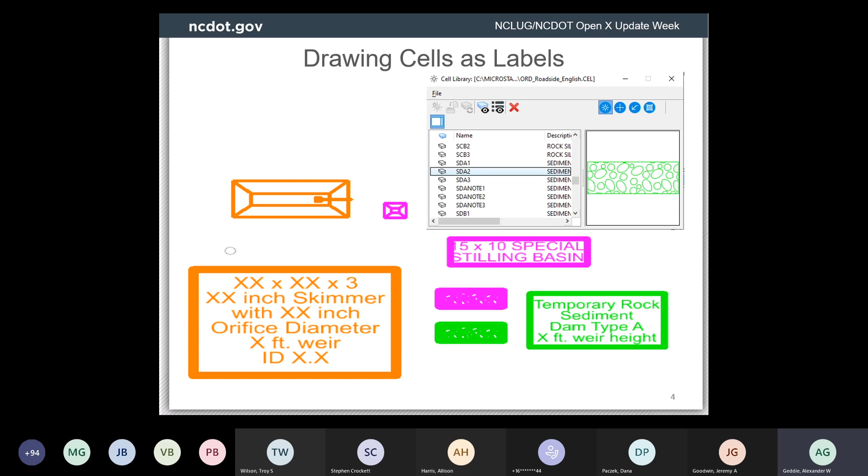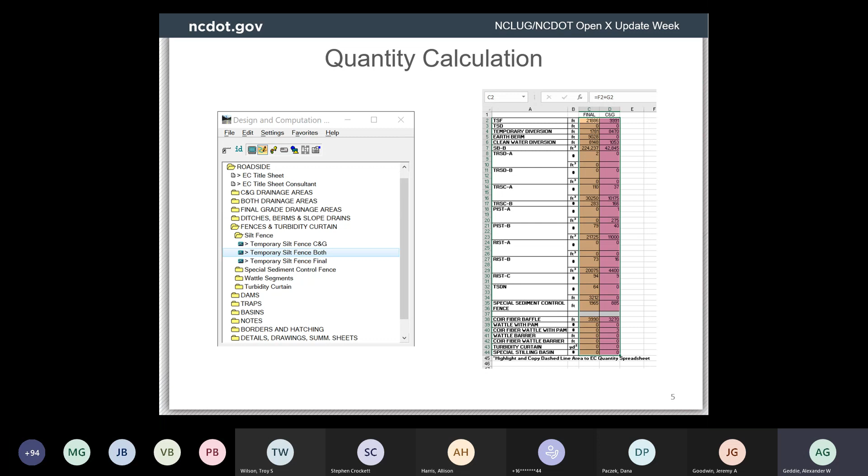And I'm sure those of y'all who have had to develop plans or review plans remember the design and computation manager. It was good for what it was at the time, but we're hoping with OpenRoads, and we'll show you, that there's a better way of doing things, especially since the old D&C manager was known for missing certain unchecked cells.

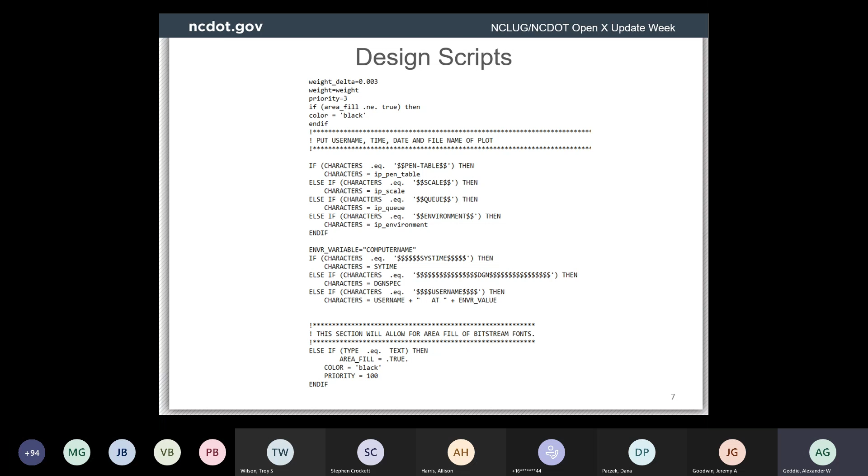Similarly, the level filters are no longer going to be the primary tool used in OpenRoads Designer. We have a new replacement for that. And I don't know how many of y'all have actually looked at the design scripts that we used to plot with iPlot, but the new pen tables are going to be a lot more useful.

So where we are now, we've developed a whole feature definition library, and so that's allowed us to utilize the geometry tools, whereas before it was optional to use the geometry tools, especially for roadside environmental. Now we're really pushing towards that because these tools are just a whole lot more intelligent.

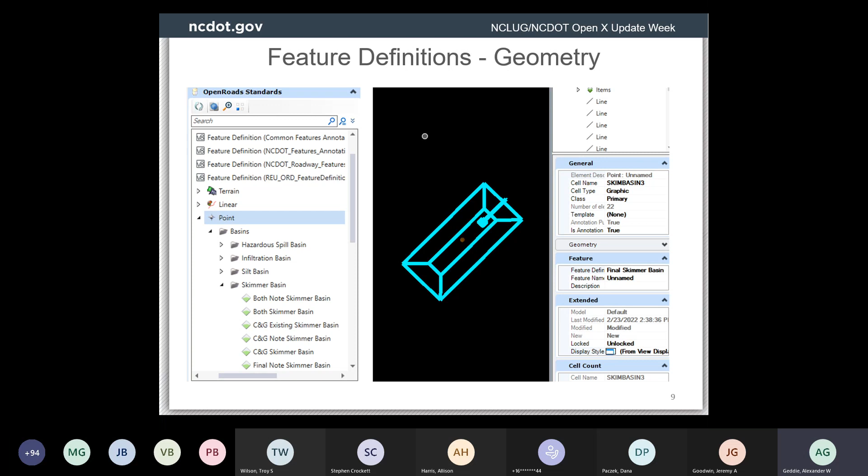So included in that intelligence, we have the quantities that we can assign to each feature definition. Each time we put down a basin, we can count that basin. What y'all are seeing on screen right now is more of a prototype, we'll rename stuff as needed, but it gives you the idea that every time we put down a basin, we're going to count it. At the end, we can export that to an Excel sheet or CSV file and count up how many basins, rock checks, and wattles we have on the project.

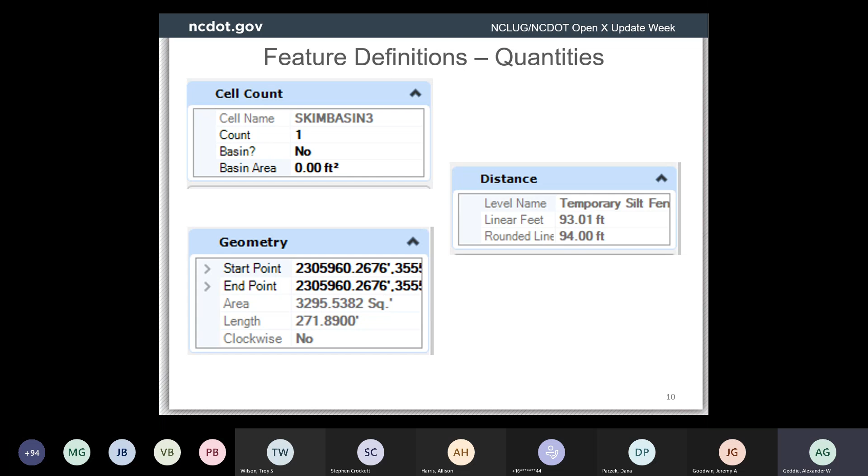Similarly, how many linear feet or sections we need for silt fence, and even potentially how much matting and grass cover we need.

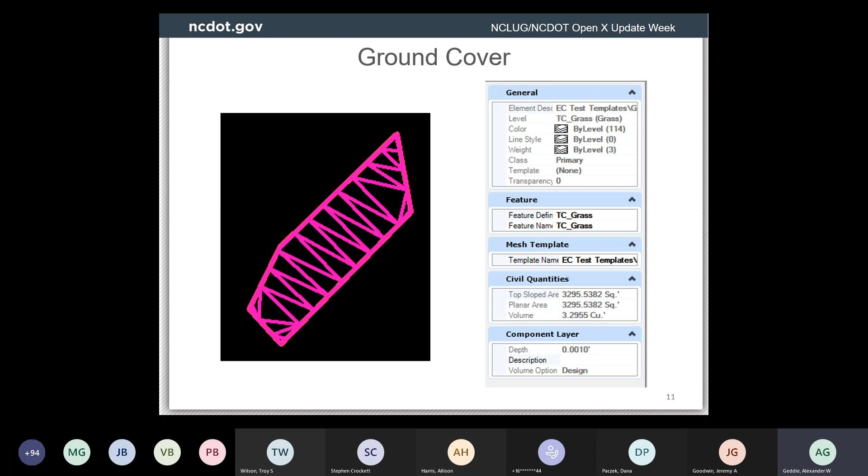Leading into that, we do have the ability, and we're working on this right now, of actually drawing matting and grass cover. For now, we'll still be using the matting summary sheets, but this will help verify that the matting summaries are at least somewhat close to accurate. If you see the civil quantities section on the right side, that's going to be one of our main references for matting summaries.

One thing we're really hoping to utilize is element annotation. Right now it has some restrictions, but we see this as a very important tool to speed up plan development or revision, especially with the interchangeability of a feature definition. If the designer says it's like a type B protection, and we say no, we want it to be type C, it's going to be a lot easier for the designer to just go back, change the feature definition, and bam, you get that C label.

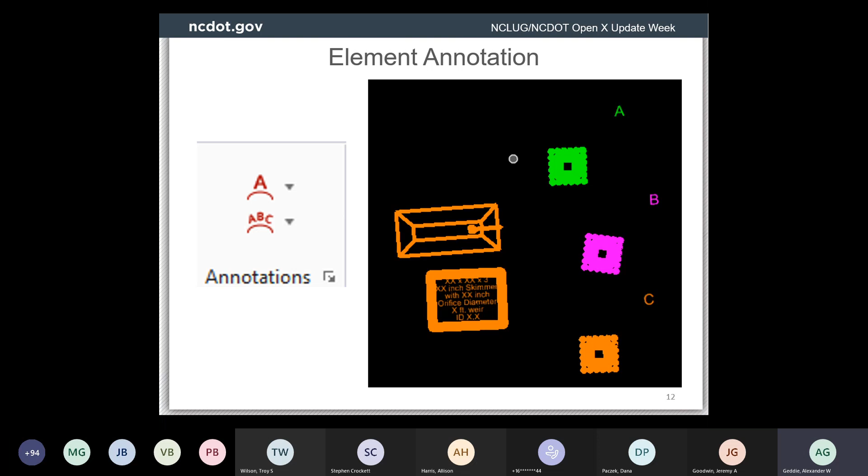Also for basins, no longer do you have to go searching for those notes. With the element annotation tool, you just select the basin and your note appears directly there.

So with the feature definitions and the information we've built into them, we're able to develop item type reports. This is going to be, at least for the foreseeable future, our reference for knowing where, or referencing against, the quantities.

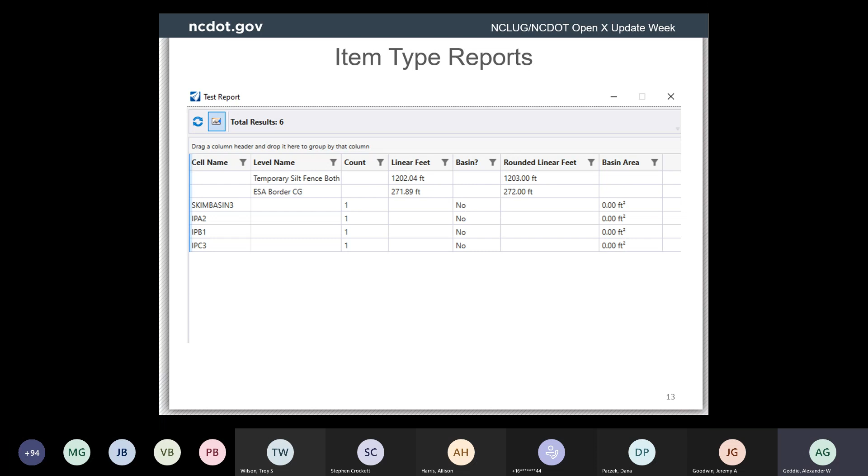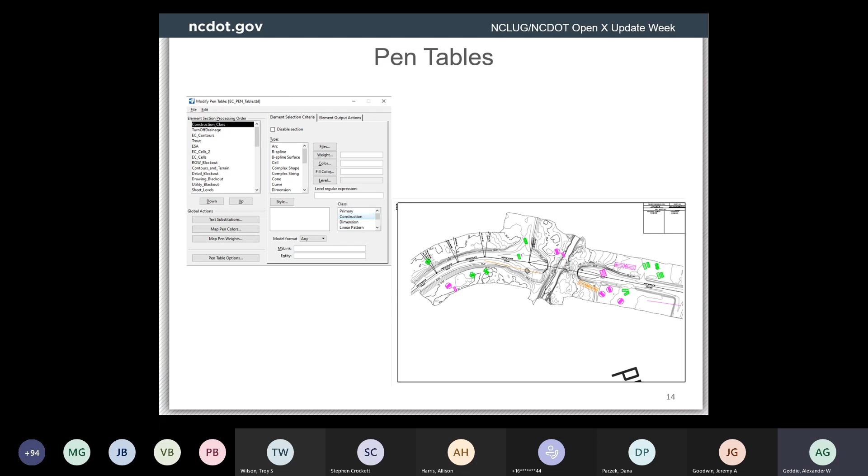And then, as I mentioned before, the iPlot file and the level filters are kind of combined into these pen tables. I remember Roadway talking about this, and I'm sure other units have as well. But pen tables are going to be incredibly useful for what we do, especially since we can develop different pen tables for C&G plans, pen tables for final grade plans. We can develop pen tables for intermediate phase if that was ever something we had to do, but as of now we are not. It gives us a lot of flexibility and makes it a lot quicker and easier.

And similarly to Roadway, we have sheeting, and this is just going to make things a lot easier combining the sheeting with the pen tables, and you're going to be able to just spit out printable plans in no time.

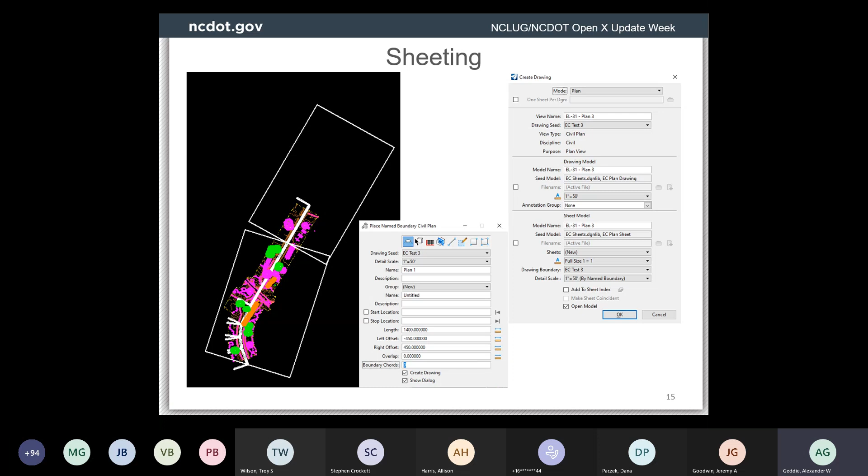But we are still going to be using our spreadsheets, our basin designers. They're going to still be quite necessary. Maybe in the future these could get built in, but that is speculative, and at this point we can't commit to any of that. So the tried and true files are the way that we're going to keep going, at least for designing basins.

But in the future, we intend to have the ability to design basins in a custom manner. That way we're going to get more accurate quantities in terms of earthwork and storage capabilities. This will also help with potential conflict resolution in case a basin, and this has happened before, conflicts with a utility that's on a site. In theory, these 3D basins are going to give us that kind of information.

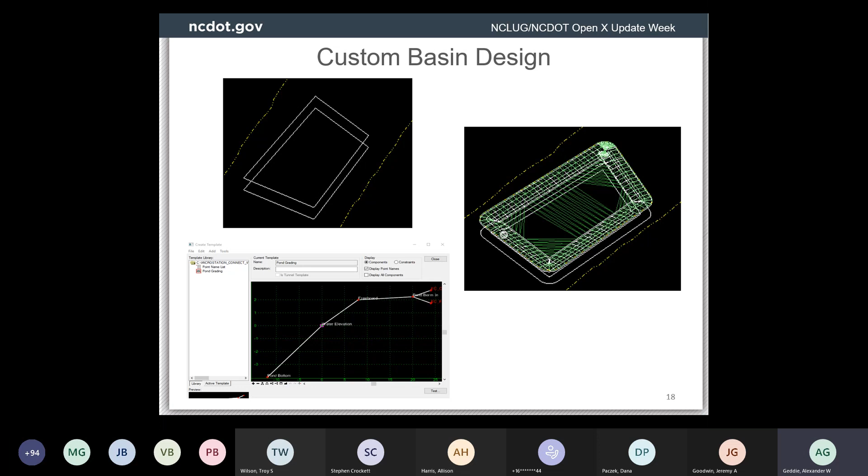And similarly with 3D cells, we hope to be able to show these on a plan to give us an idea of any potential conflicts. As you can see there, we have a very rudimentary prototype silt fence, and we're hoping to develop more 3D cells in the far future.

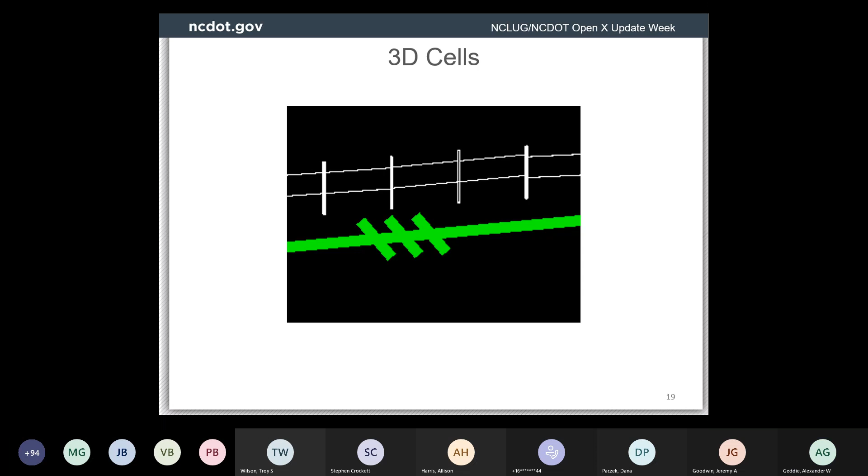I can't reiterate this enough, your input is critical. Some of y'all who look at our workspace or have been waiting for an update have seen that we haven't put out a whole lot. We intend to put out a more complete workspace rather than piecemeal releases, because we want something that's a foundation to build from. We're concerned that if we piecemeal our releases, some users may get comfortable with what we've put out, only for us to decide we need to change it. We just don't want that to happen.

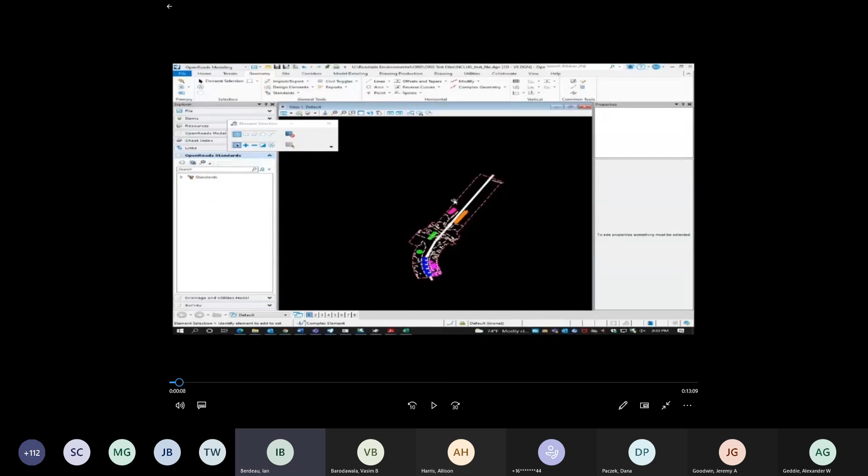Now I want to show a video. Let me end the slideshow. I'll stop sharing and then share this. Can everybody hear that before I resume it? I think if we zoom a little better, that's the best I can do. If you reshare your screen, there should be a toggle where you can say show computer audio. You want to stop sharing and try sharing again. There should be an option to check for audio, system audio.

First, I want to draw a drainage area, one of the first things we do. Everybody can hear that? Yeah, you're good.

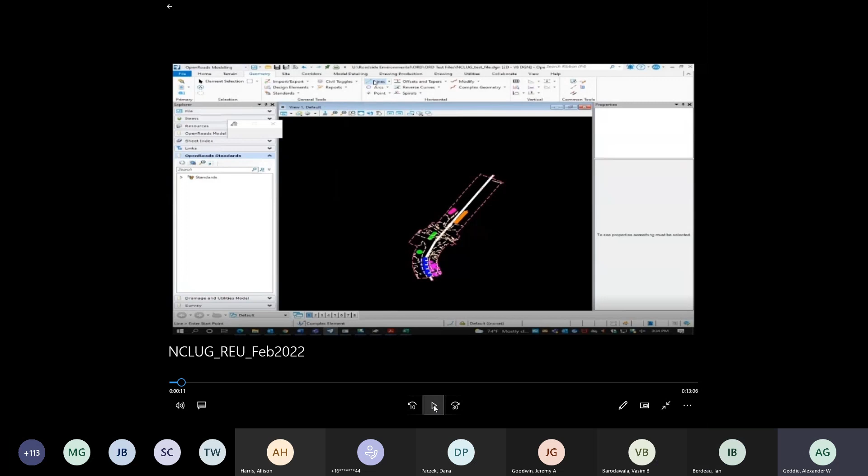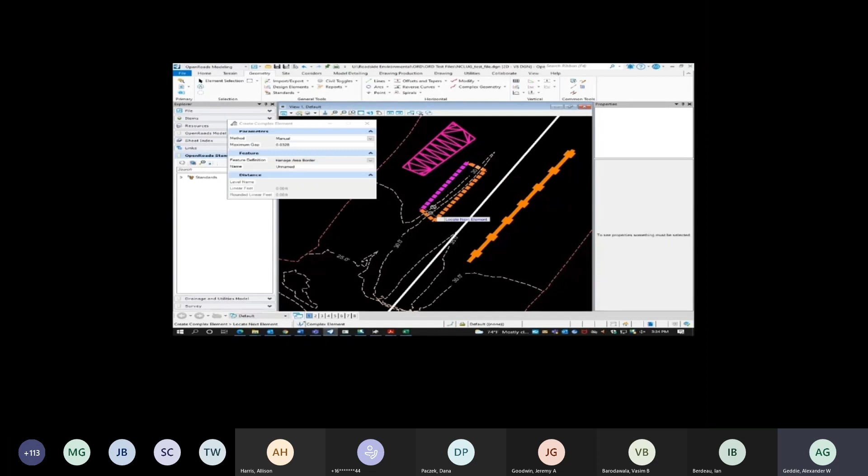The nice thing about OpenRoads Designer is that we can get an automatically calculated area. So here I'm just drawing the four lines, and then I'm going to complex these, doing it all in the same direction. Got to make sure that feature definition is correct though, otherwise if it's set to no feature definition, you might not get what you hope to get out of it. So 3, 4, accept it, and there it is. We'll click on it, get some properties, look over to the right, and there in the middle geometry section you see a calculated area and perimeter.

We've made adjustments not just to the lines, but also to the point geometry, and that's been a really nice thing. It's made the workflow a lot quicker, and it makes it a lot easier to make adjustments later. So for those of you that receive our reviews, it's just a lot easier to go back in and edit it.

So here I'm showing a list that we have. Now you may notice I've got other workspace folders in here as well - that's just what I'm doing. The workspace that y'all will receive will be a condensed roadside environmental only workspace.

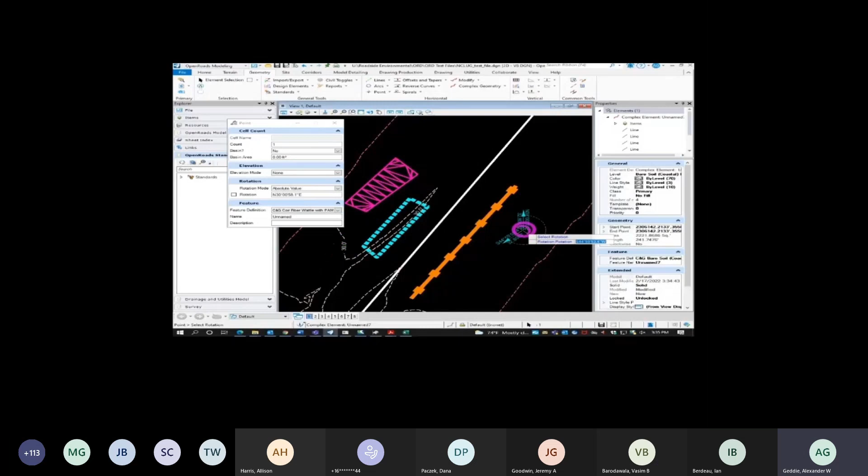Let's drop a wattle in there, let's put one over here. Now keep in mind, this isn't actually any sort of engineering design, we're just having fun. So I have two, but let's say I wanted to change one up. We'll just click on it, go over here to feature definition, and then we'll just change the feature definition. Simple as that.

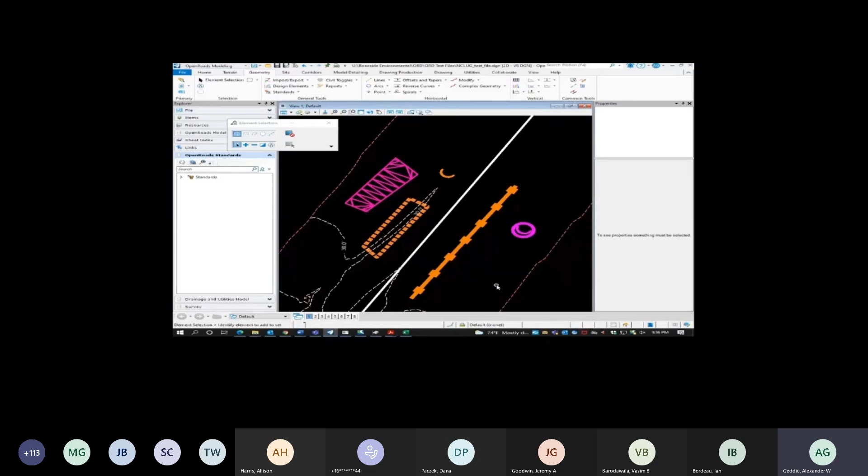And we've created the cell count item type. So right now it's got count information if it's a basin. That count will help us with quantities later.

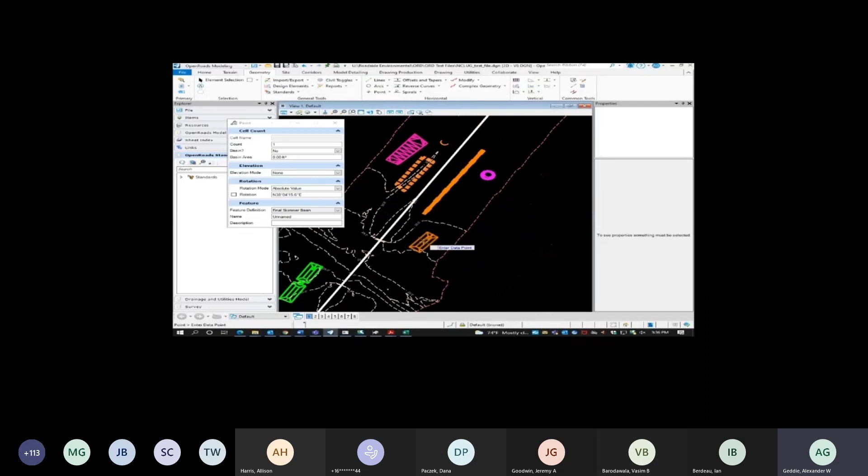I want to show you basins because we have some information or features associated with basins that we believe will make things go a lot easier. But first I'll go ahead and drop one in, I'll rotate it. You see it's a skimmer basin - yes, it's not oriented the right way.

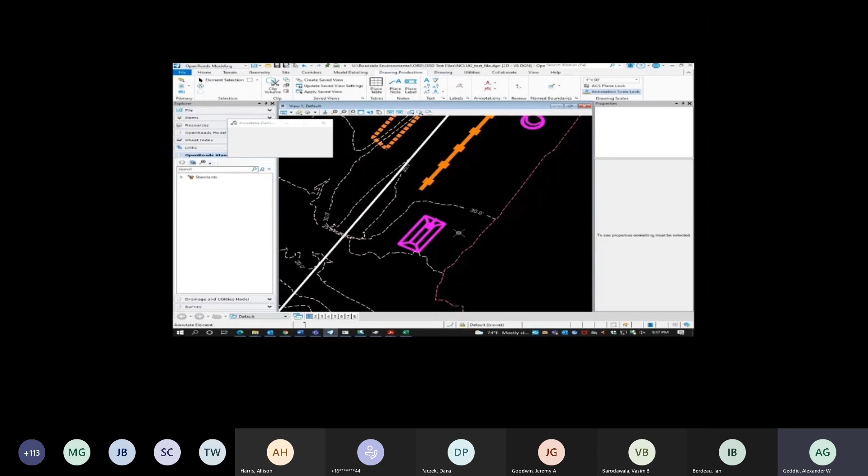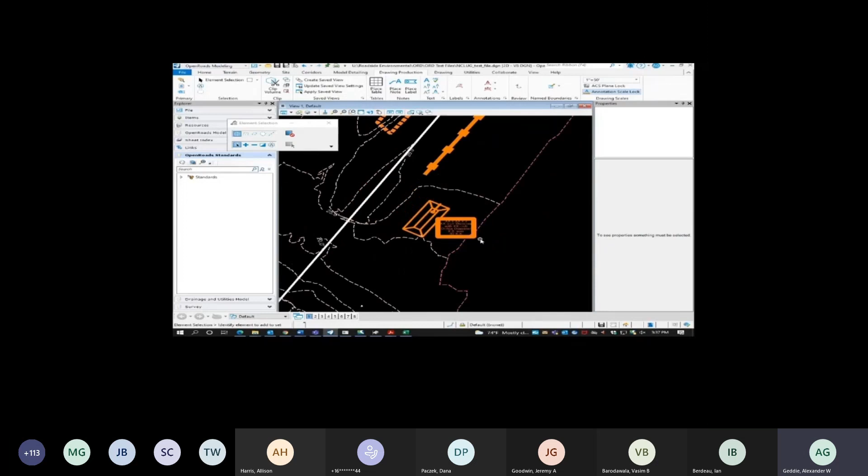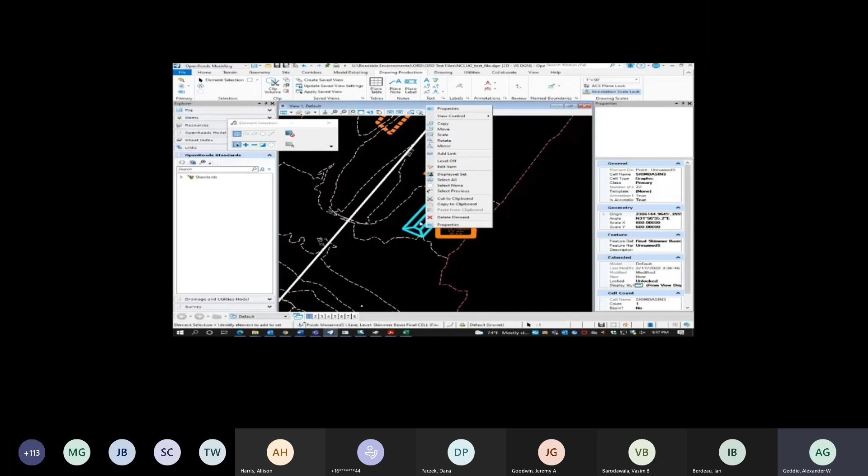Now we'll go over and actually annotate this basin. So we just use the annotate element tool, click on it, accept, and there you go. Now we attach these labels to the different basins to make it easy - if you have a skimmer basin, you're going to get the skimmer basin note. So you just edit it. You know that every basin will have its note, which is going to make things a lot easier. Now you don't have to go back and search for the note, it's right there attached.

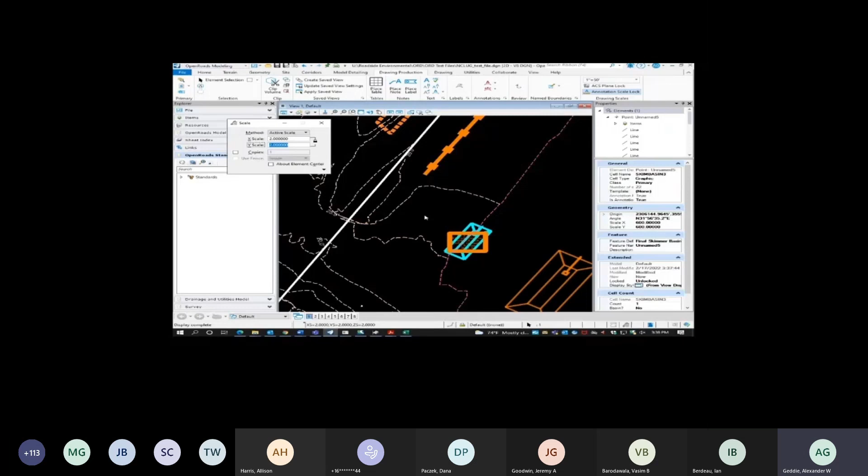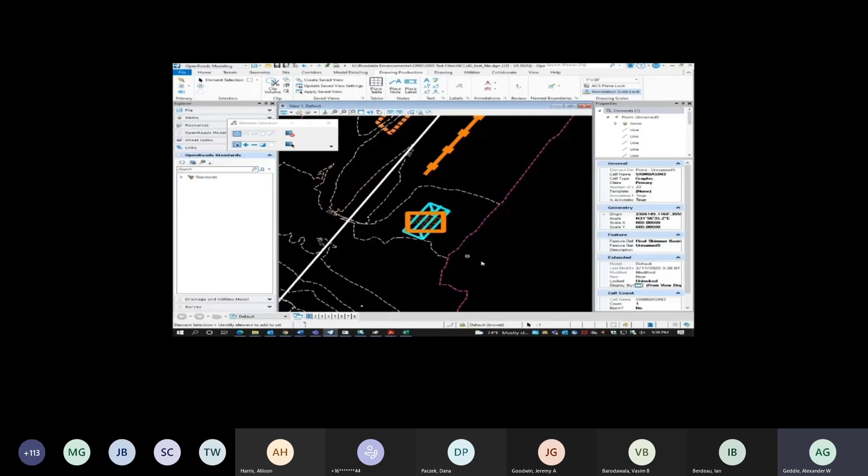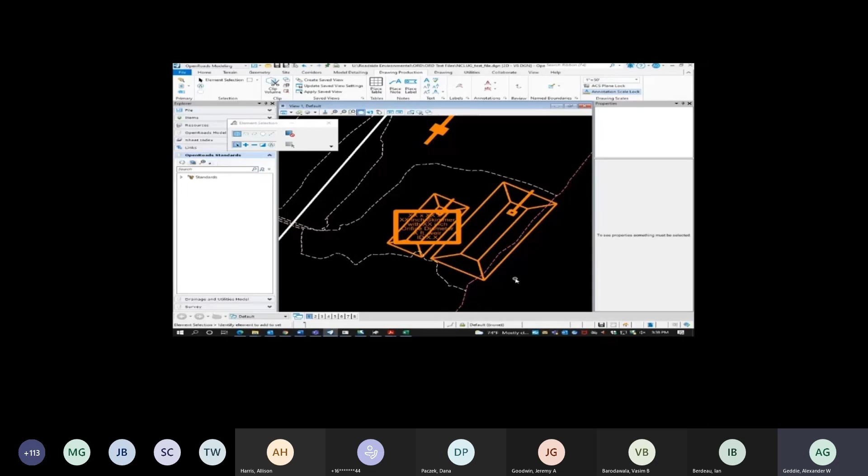Now we do run into an issue with scaling. As you can see, I'm going to try to double it, and I click it and it reverts back. The issue is because we're trying to scale these cells, and right now Bentley doesn't allow us to do that, though Bentley has talked about parametric cells in the future. So right now, the way to work around this is to copy it and scale it. We're copying it, we're going to select it and scale it. Technically what happened when we copied it is it's no longer the feature point geometry - now it's like your old drawing cells.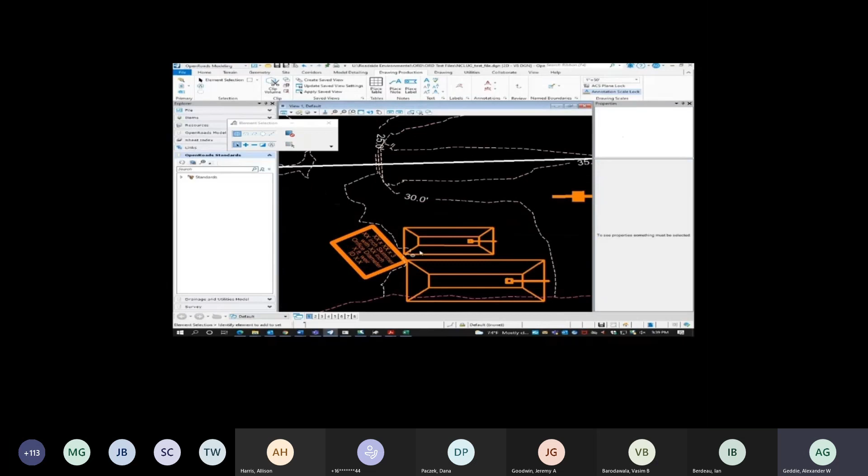And look at this label. Unlike some of the civil labels you've seen from other units, our labels currently do not rotate automatically with the view. We can use the civil labeler, but what we really want is to take the cells we already have and have those rotate with the view as well. That's something that's been requested.

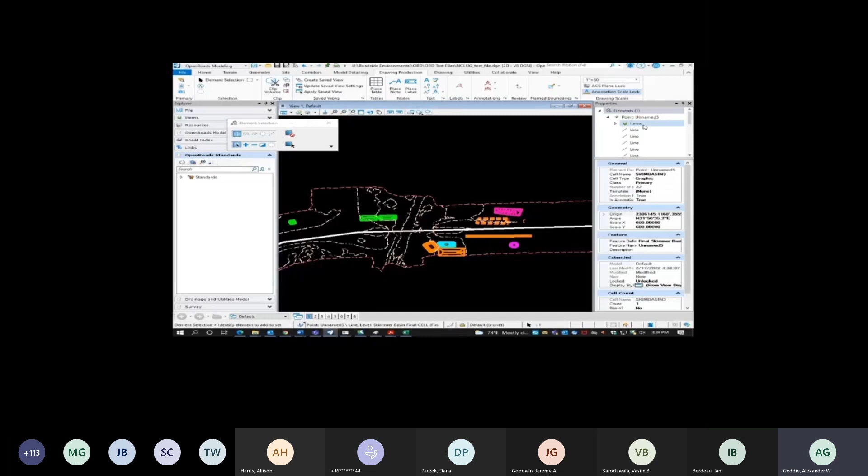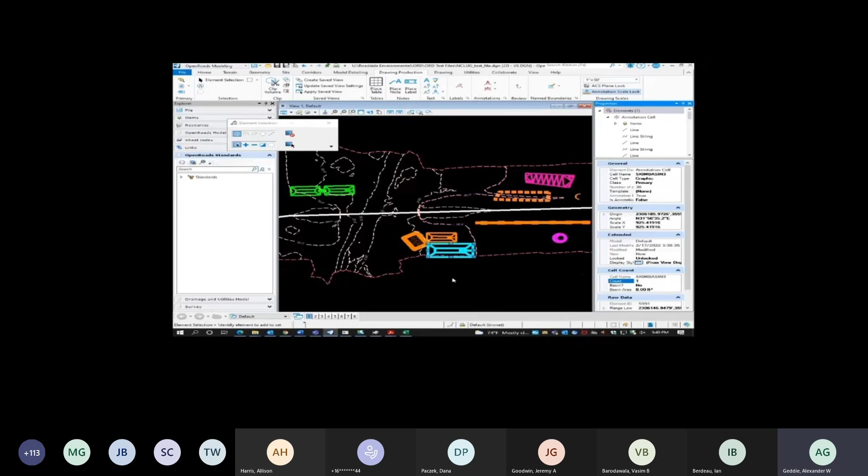On the right, you can compare the properties. We've got the point there from the original basin. Click on the copied scaled basin, and you can see it says annotation cell, so they are technically different. However, it still has the information, the item types we attached to it before, so it is still serviceable and usable. It's just not going to be the exact type of basin or point geometry we're hoping for, which for right now is fine. We'll find workarounds if that does become a problem.

The nice thing is, since we have those item types, we can build a report. So I'm going into this report. I haven't labeled anything, so it defaults to all untitled. We'll add the report definition, and you can see as I scroll down the different options.

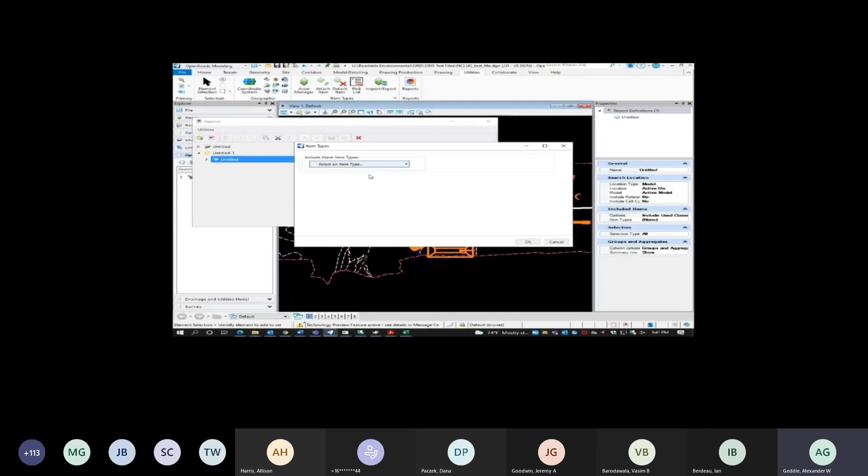Here we'll select our item type. So I've got cell count and distance. Cell counts are for the point geometry, distance is for the linear geometry. Of course, we can always add more. These item types were developed in 10.09. We haven't made any changes since 10.10 was introduced, we just adopted and adapted them over.

But I'm going to build a test report. Sorry, my computer is a bit slow, so I apologize. We go into the column, and we care about cell count. Let's just go ahead and add everything.

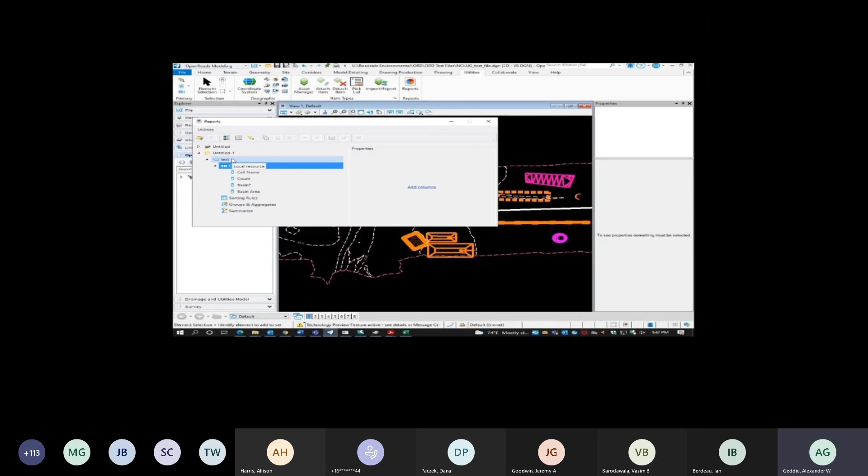We'll preview our table. As you can see, I had manually adjusted that skim basin 1 cell. I changed it to reflect that it is a basin and manually entered the basin area. Once we do get into 3D modeling, that can be developed automatically. As you can see at the bottom, it's shown skim basin 3 twice - one from the original point geometry and one from the copied annotation cell.

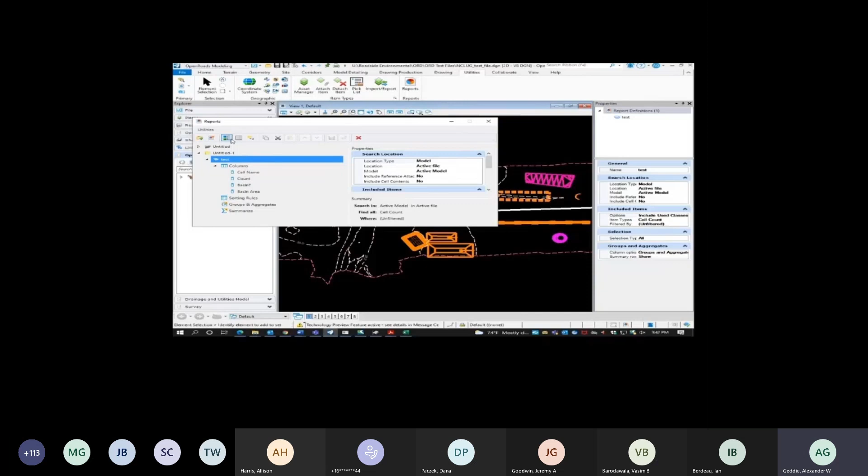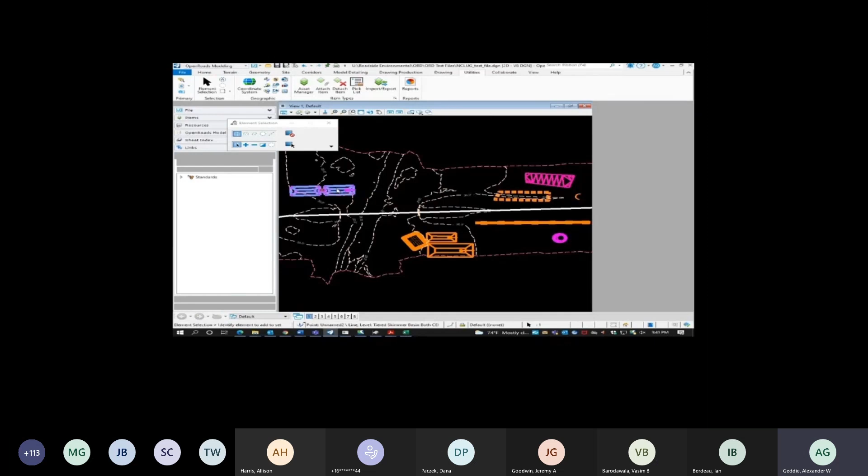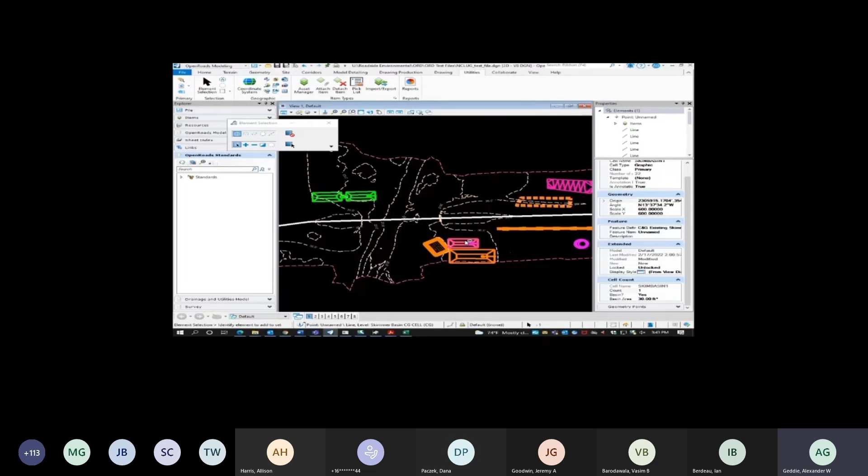So we'll click on the tiered skimmer basin just to show you that it was picking up everything - that tiered skimmer basin, that skimmer basin down there, and I manually entered that. You see the two skimmer basins up there.

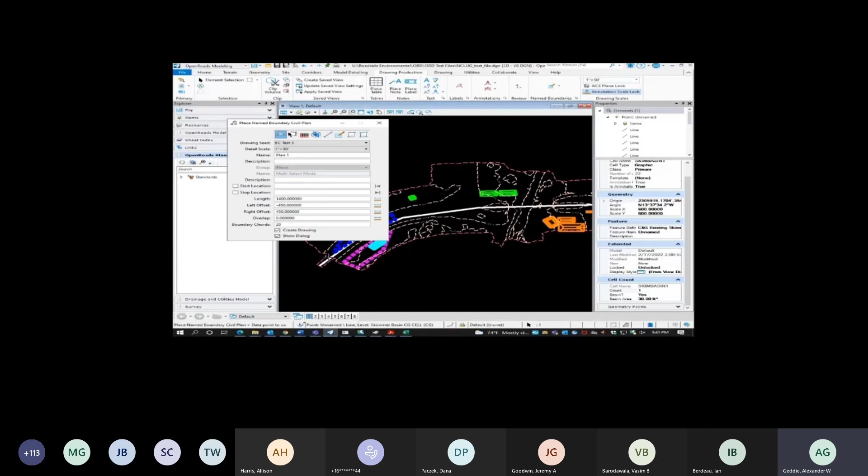And now I think it's ready to show y'all how to do the sheeting. So right now for this test purpose, we're not ready to show you the sheeting just yet, but that will be available pretty soon. For this purpose, I'm just going to use a test sheet that I developed some time back. For all you roadway engineers out there, please forgive this horrific alignment that I've drawn in - it was just for test purposes.

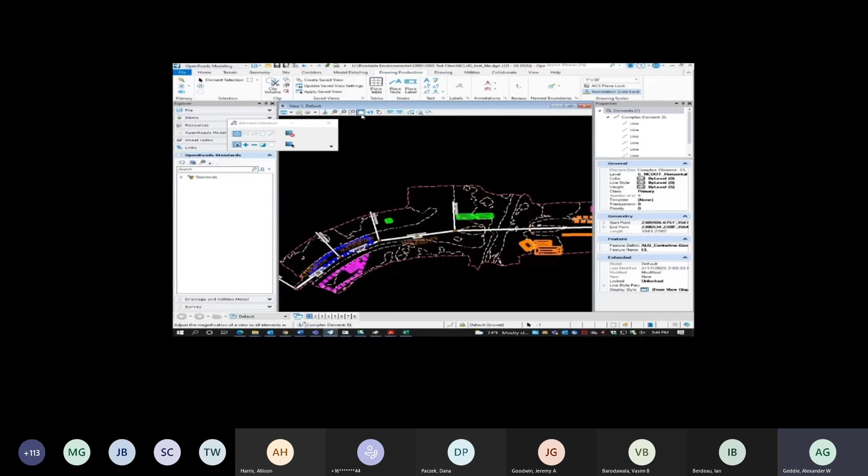So we'll draw our boundary. We're going to start back here. And since it's got default 20 boundary chords, I'm just going to change it to 1.

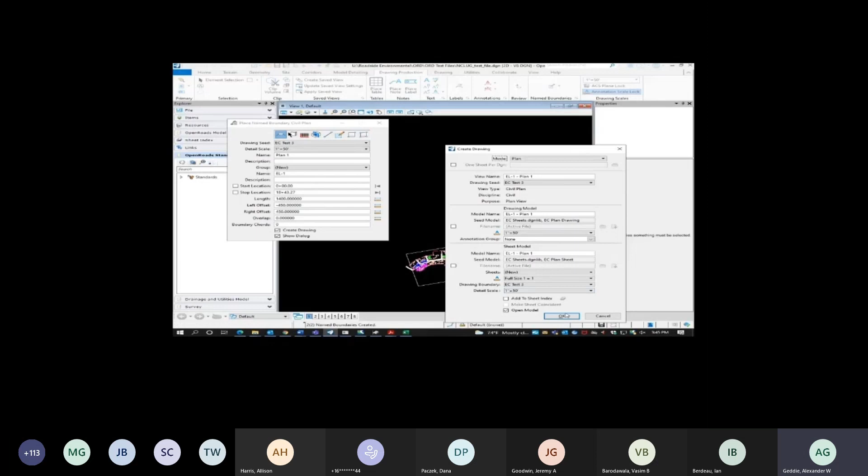As you can see, there's the EC sheets from the EC Test 3 drawing seed plan. Again, that's not the one any of y'all will receive. We'll just go to the sheet, and as you can see, we have our outline there.

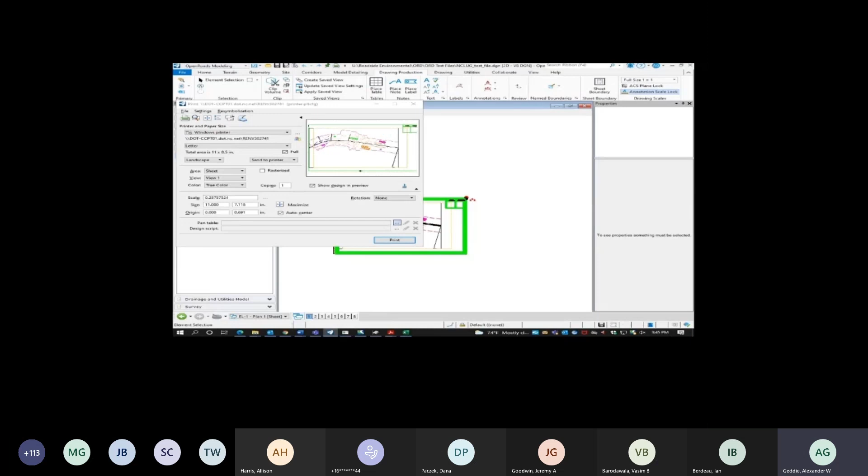Now we'll take a look at the printing. We have some pen tables that we've developed, and I'm just off screen populating our general pen table. I know it's hard to see, but in that preview window, everything else is blacked out or hidden - the only things showing are the EC devices. So we've got our purple, our green, and our orange.

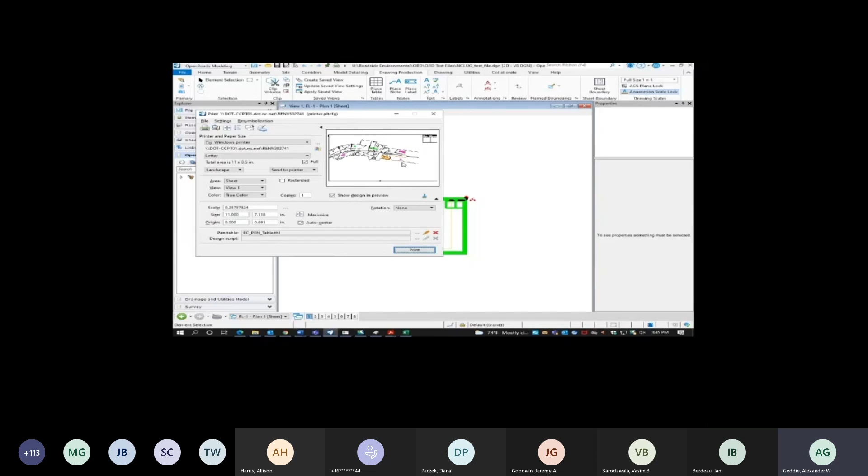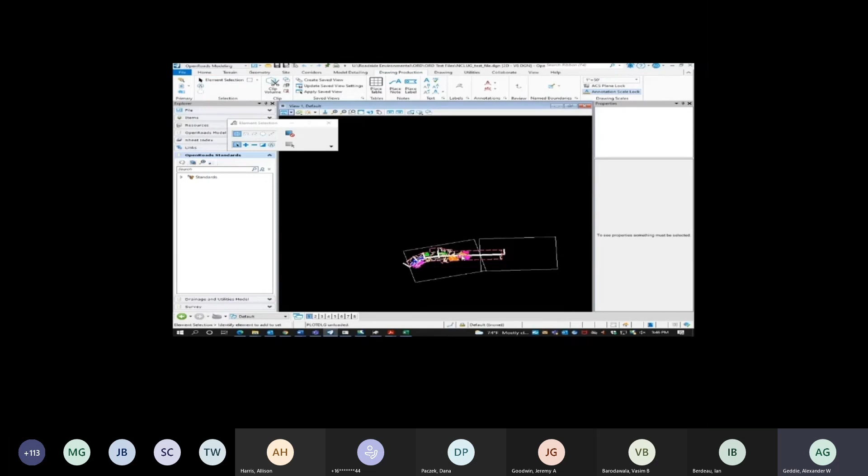Now we'll go back to the design view. One thing that we will be working on in the future is the surface templates, and that will definitely be of huge benefit to us.

I've already drawn one. That little purple zigzag pattern, that's actually supposed to be a little bit of grass. So let's find that.

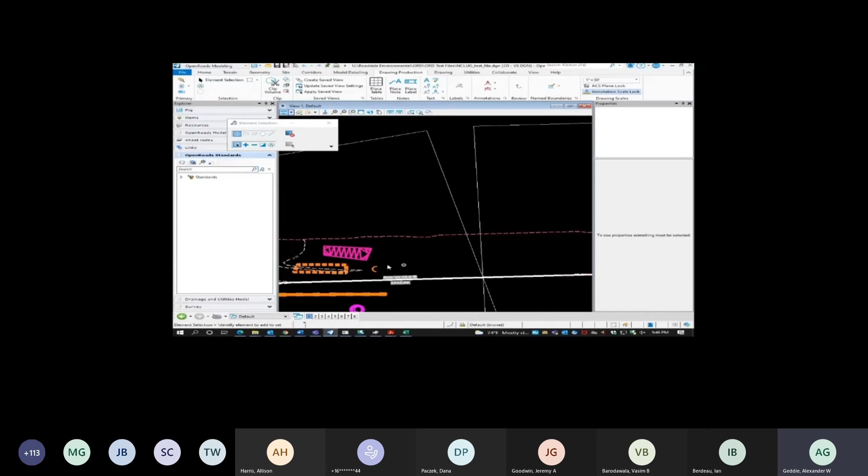There we go, there's the 3D model. You click on the surface grass and it has the sloped area, the planar area, volume if you care, but it is a standard depth. So it's just the surface area times that standard depth that you specified. Yeah, that's what we've been working on.

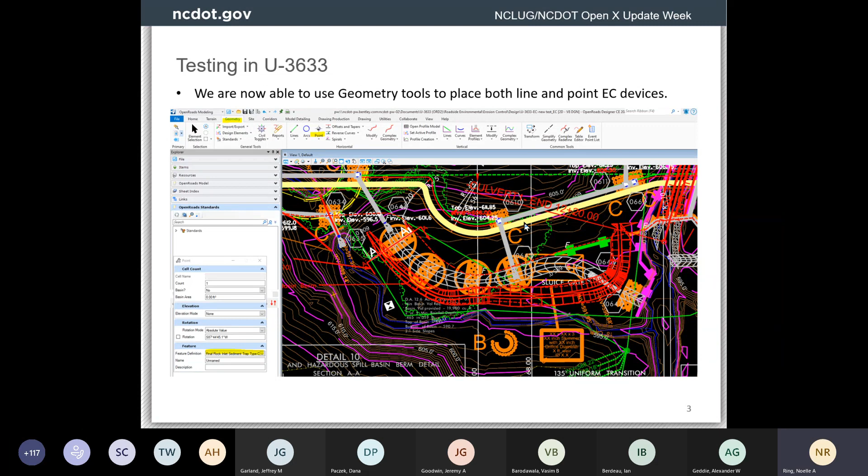So, just another challenge I ran into experimenting is placing our cell for silt fence. When I try to connect the silt fence to it, it tries to snap to the center of it or to one side, attempting to snap to one of the arms. It seems to be resistant. Haven't figured that out yet.

Still working on that. We previously used SmartLine to draw silt fence and snapped it to the arms, so to speak, of the silt fence symbol. But in ORD, we're placing each segment of silt fence, and the snapping requires some patience.

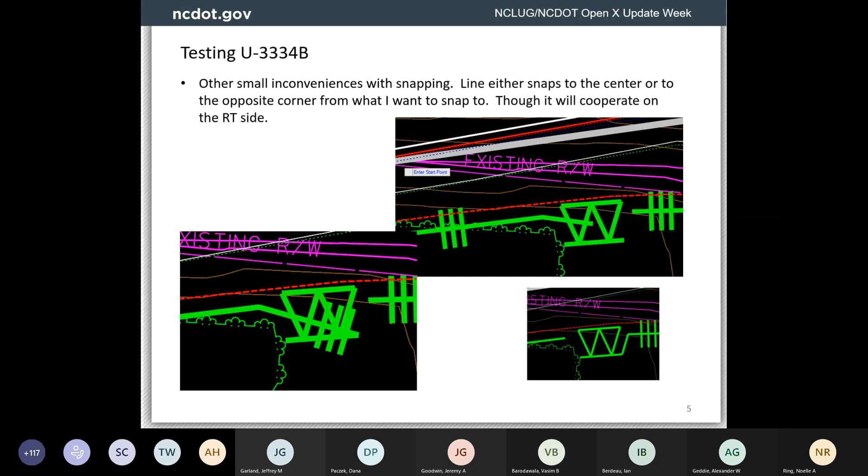We are currently, our cells are two-dimensional. We have done, as Alex said, a little bit of experimentation with the silt fence, getting a 3D representation of that, but we're still going to have to work on building three-dimensional representations of our other 2D devices.